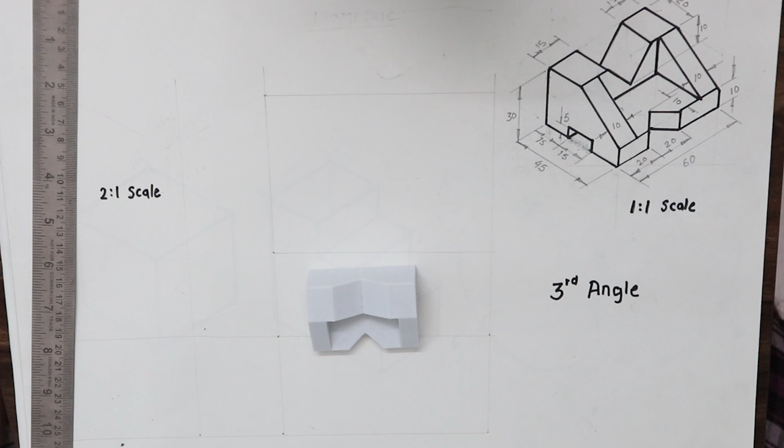Okay, hello everyone. Today we are going to do another object which is being seen over here, and today we are going to do the third angle. The earlier video was first angle, and now we are going to do this object in third angle.

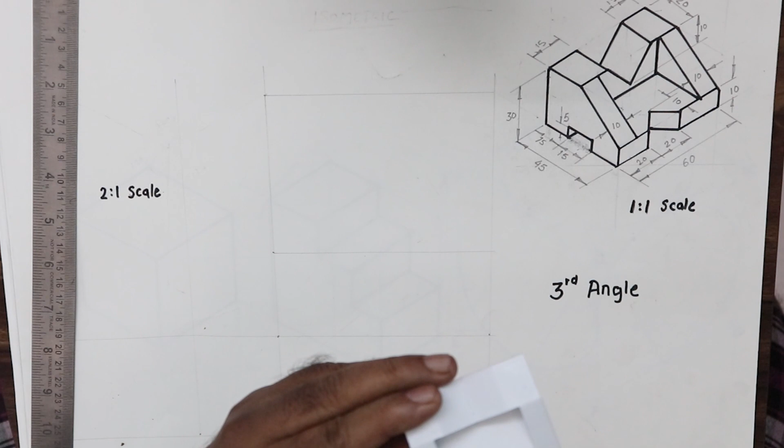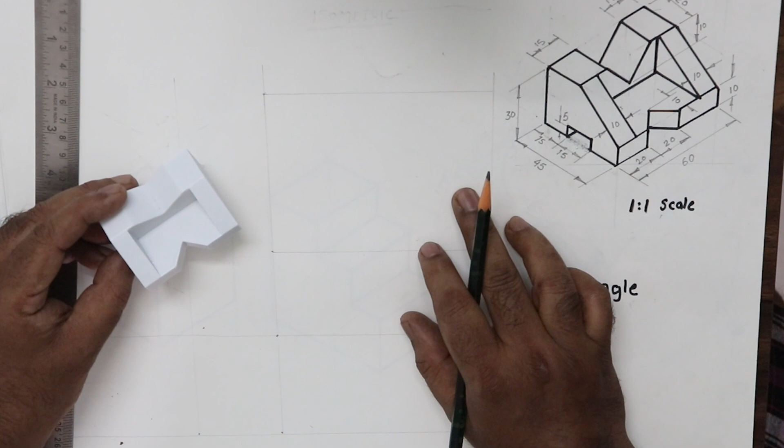Now, if you see, I have already done the isometric over here, and all the dimensions have been given. Now this drawing has been done 1:1 scale. You can see this is 1:1 scale. I have done the drawing, but the views that we are going to do in the third angle are going to be in 2:1 scale. So now let us begin.

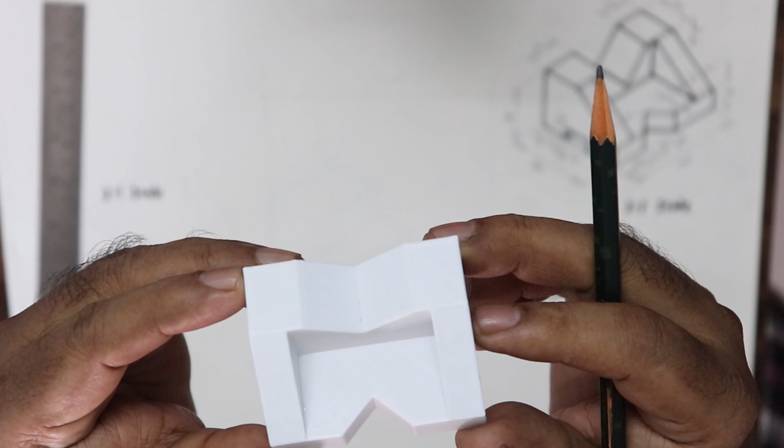I'm keeping this object here for your reference. You all can have a clear look at this object, how the object looks. So you all have a clear idea, and now if you see that this surface, this is the front view. And now first we are going to make the front view over here.

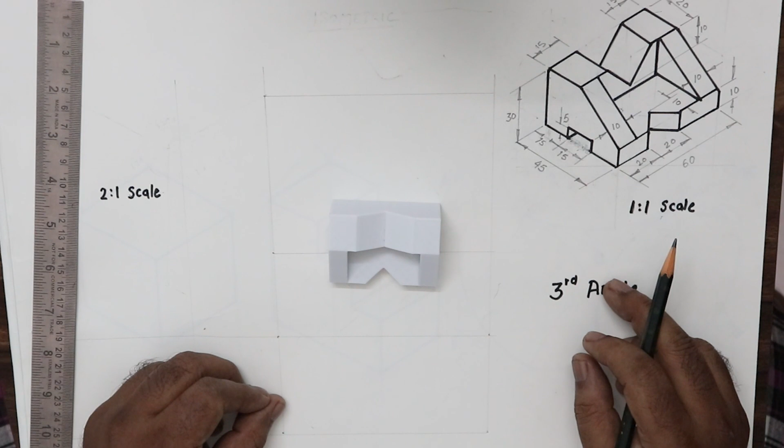So the front view will look probably like this, and then there's a top view which will come at the top, and it will look something like this. And then we have the left hand side view, from this side. So in the third angle projection, the left hand side view comes at the left, so it will look something like this. So let us try and do this drawing now, and let us see how it works.

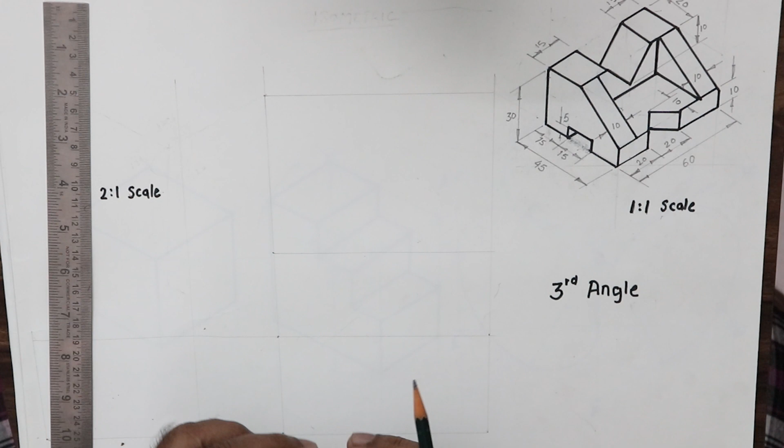So first and foremost, let us go to the front view, and let us make the block. So now the block will be the length of the object, the breadth of the object, and the height. So if you see over here, faintly I have done the block. I have done this block is 60 by 30. Height is 30. I'm sorry. And the front side is 60.

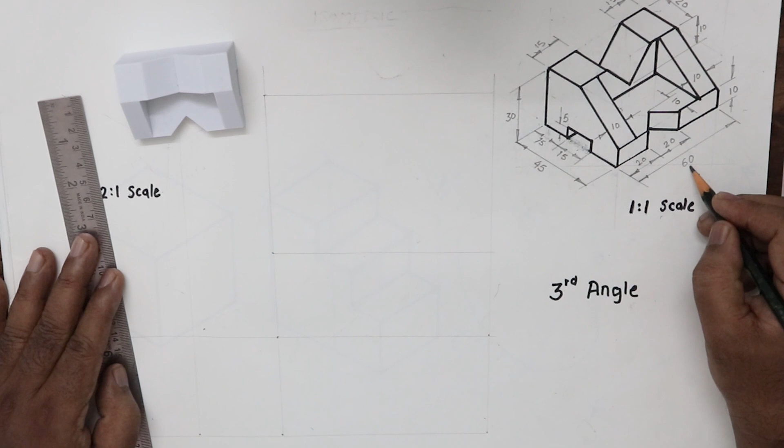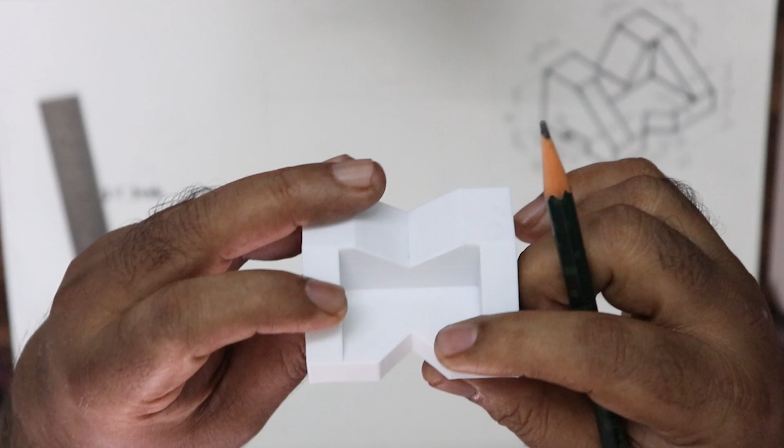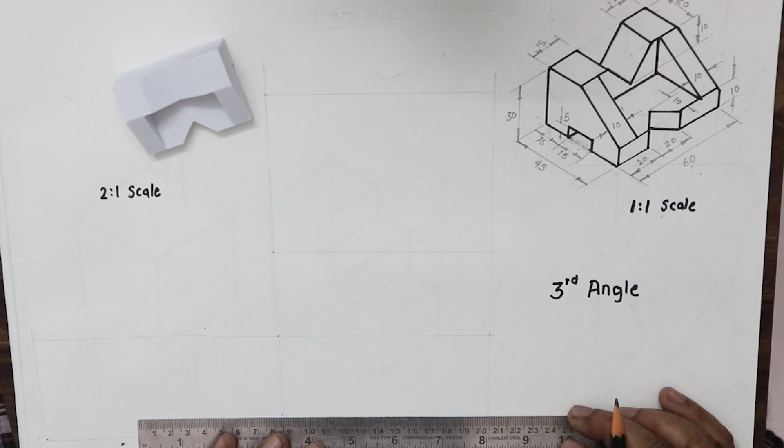Now let us start doing the drawing from the base. So if you see, the base of this object is around 10 mm thick. If you see over here, this is 10 mm, and here it is given as 10 mm. So I will draw a line that is 10 mm. Basically, when you do your drawing, see that your construction lines are very thin, so that you can easily rub it off.

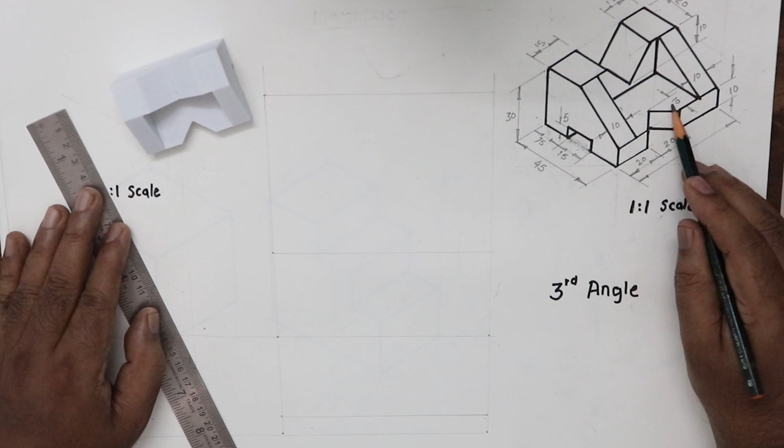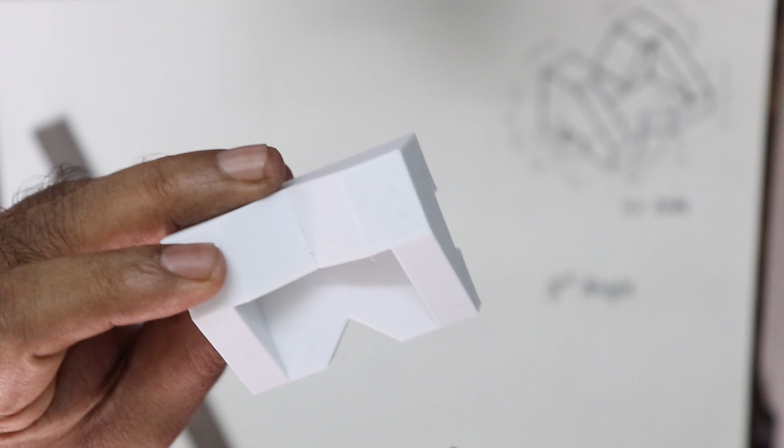Now I have done the 10 mm thick, and now I will take this V groove which is there, which is 20 from both sides, and it's a 20 mm thick V groove, 10 mm deep. So this V groove which is there, you can see it is 20 from one side, it is total 20, and it is 10 mm deep. The depth of this is 10 mm. So let's start by doing that.

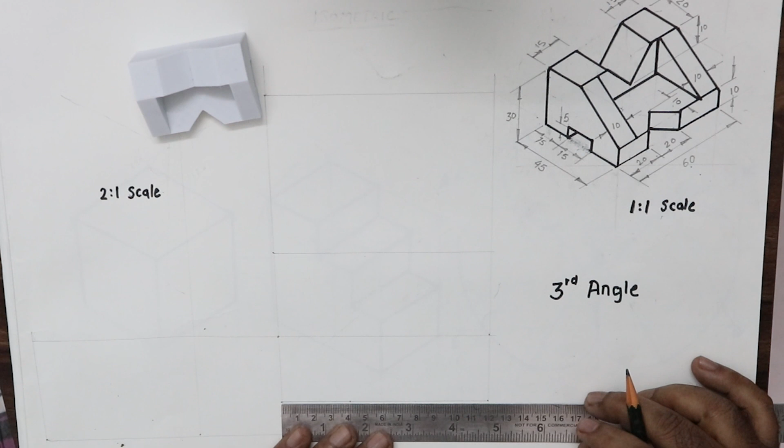So now here, since this is 2:1 scale, I am taking 2:1 scale, so I have to double it. So the 10 will become 20. Now I'm taking this as 40, and again I'm taking this as 40, and there's a center line on 20.

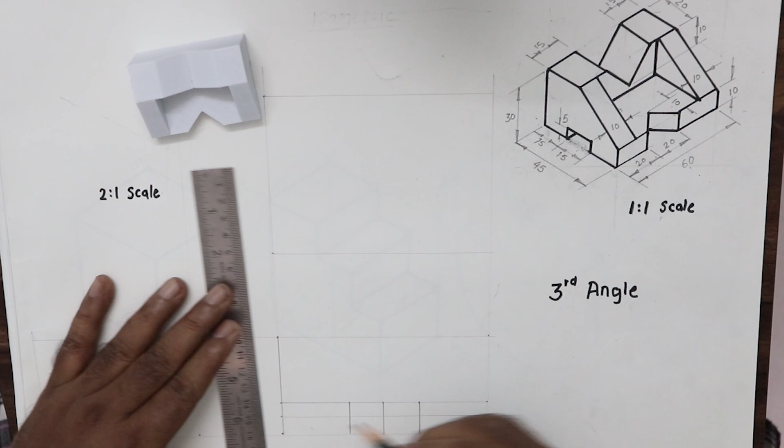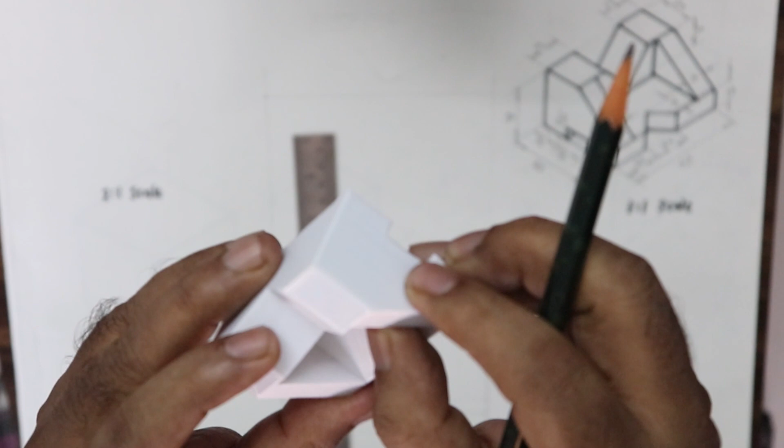Now you can see there is a small step over here, the support, which is also 10 mm thick. You can see this, it is 10 mm thick. So we are going to do that, but here it is going to be 20, since it is 2:1 scale. So I'm going to make this 20.

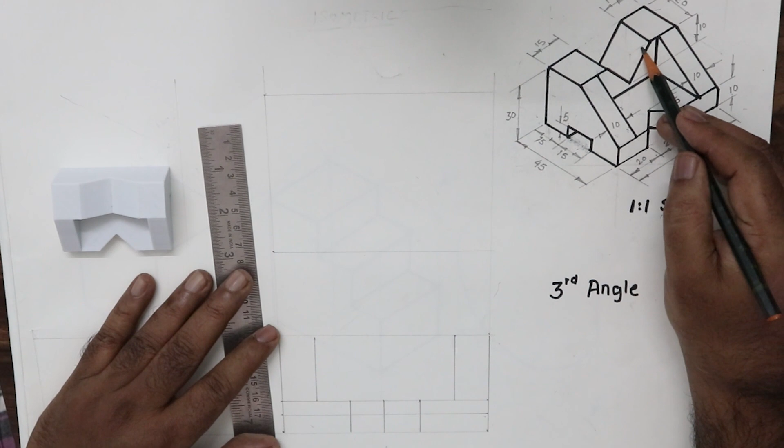And now I need to do this groove which I can see from top over here. So from front view, this groove will look like this. You can see this groove over here very clearly. Now what is the size over here? It is 15 and the depth is 5.

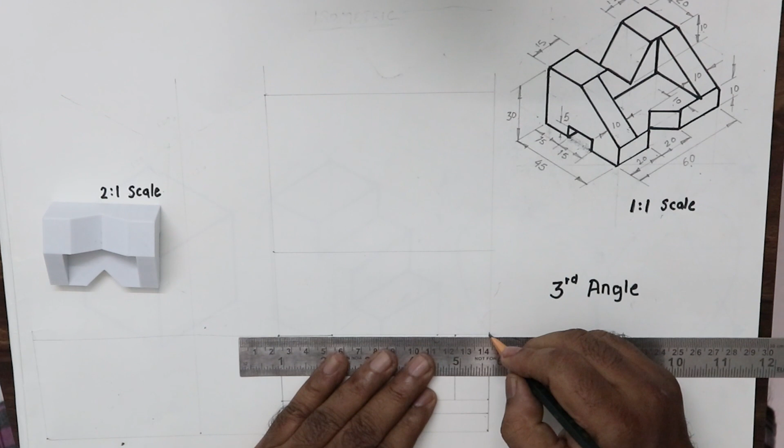So I am taking 15. That is, now I have to take 30 over here, 30 from this side, and the depth of this is going to be, since it is 10, I am going to take it as 20.

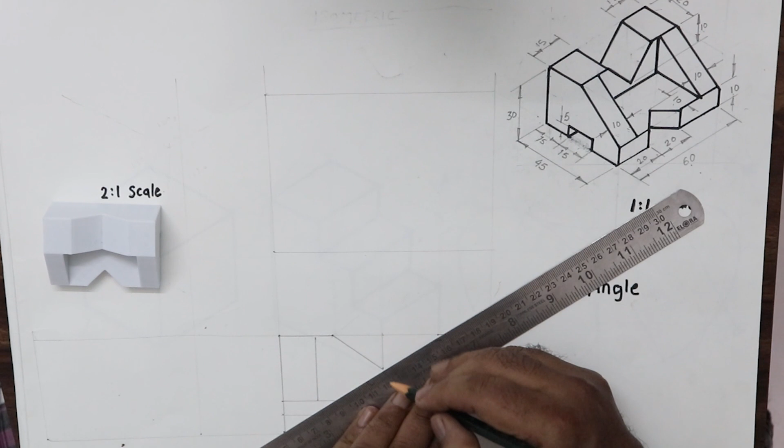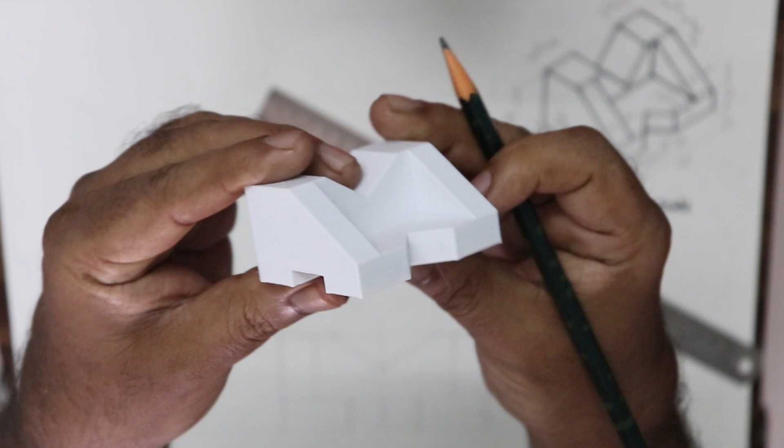So I am sure you can see this image over here. It looks exactly like this. But if you see, there is a groove at the side. There's a groove at the side, and this groove will come as a dotted line. So I already have this over here, and this will come as a dotted line throughout.

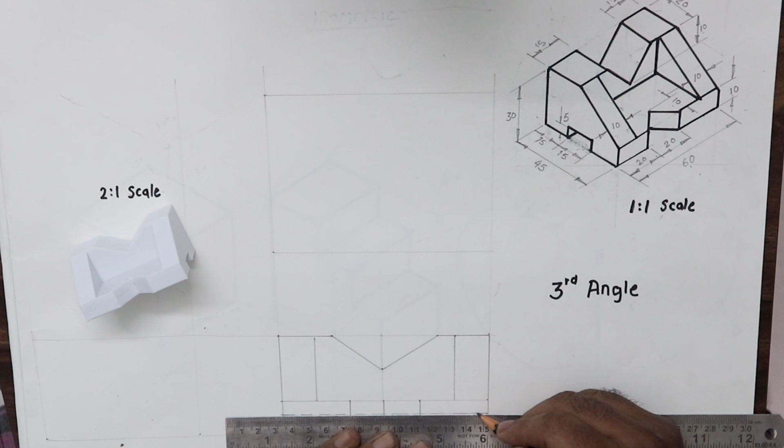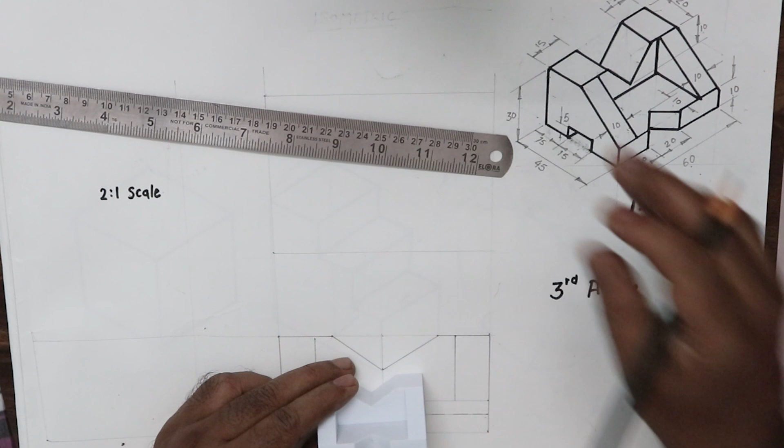Now let us go to the side view. So the side view, the left hand side view in a third angle will always come on the left hand. I am repeating again, the left hand side view in a third angle drawing will always come on the left hand. So this object, the left hand side view, when I am turning it, it will come on the left hand and it will look something like this. So now let's start drawing this side view.

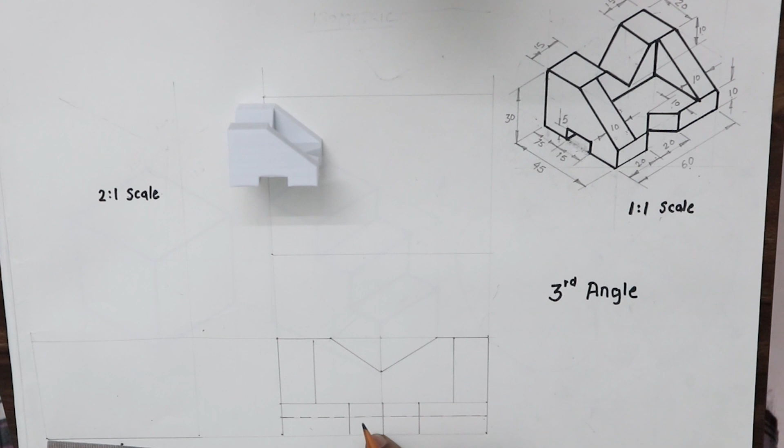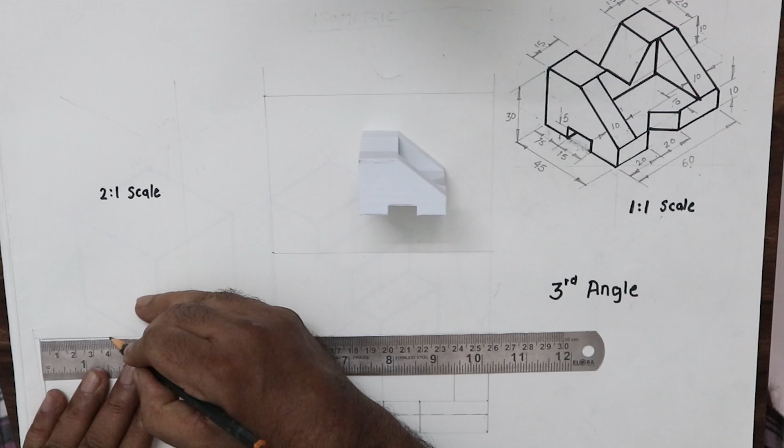So now here I have already got the block. I am taking the height as 30, but here I am taking it as 60. And now if you see this over here, the distance of this thing over here is 20. So here I am taking it as 40 since it is 2:1, and here it is 10. This will come like this.

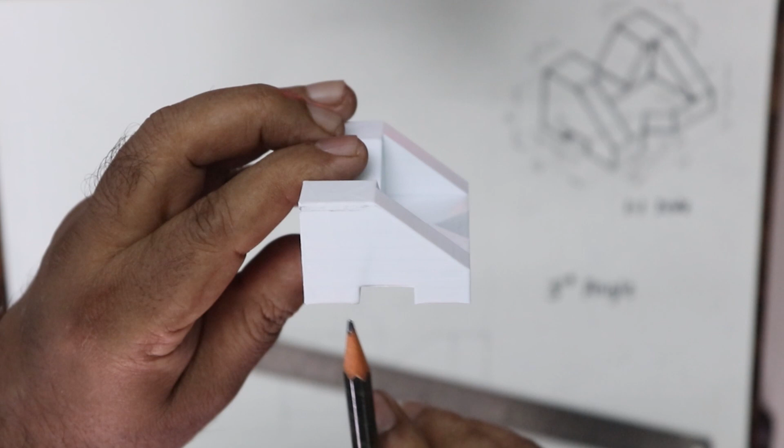Now what we have is this groove which is there. It is 15 and 15. So we have to take it as 30 and 30. And the depth of this groove is 5 mm. If you can see over here, it is 5 mm. But here we need to take it double, that is 10 mm.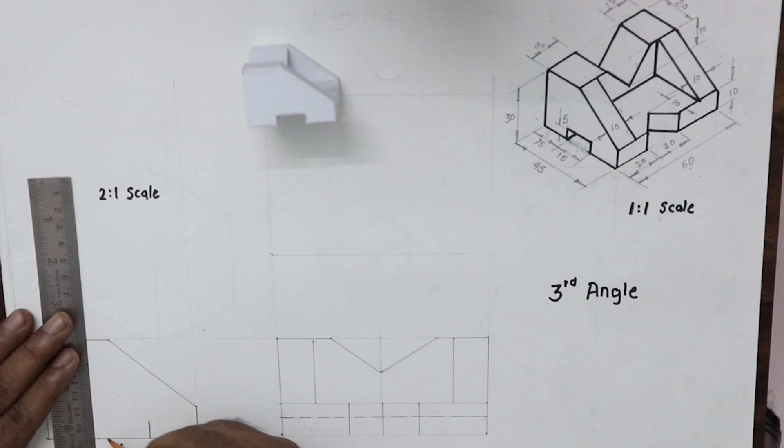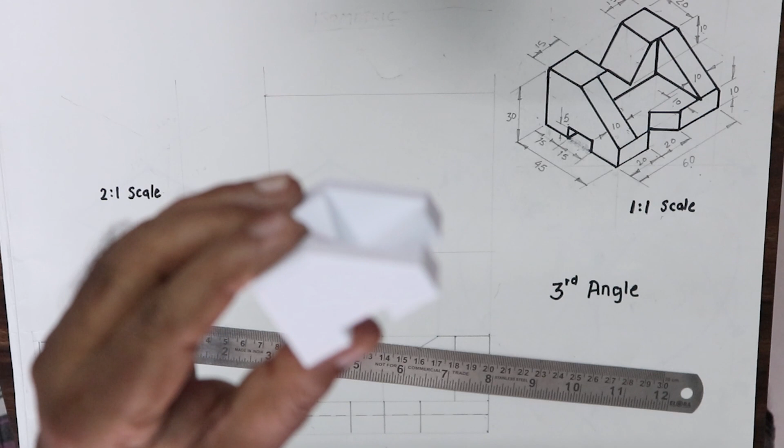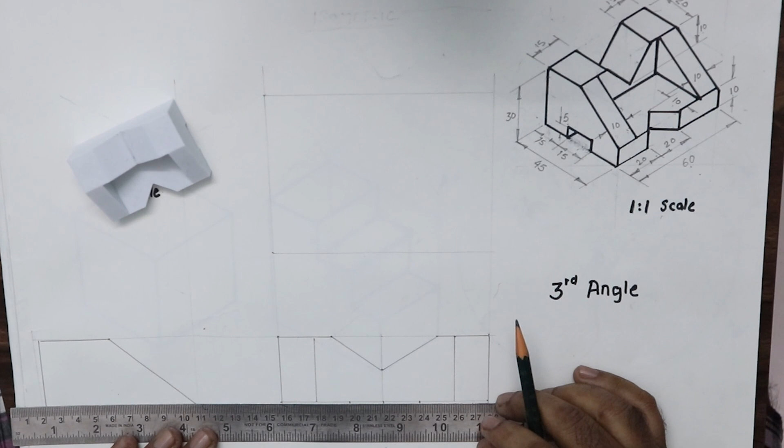Now, since there are some hidden lines in this side view, for example, this line which is hidden, we cannot see this line, the groove which we cannot see, the inside groove, and these things. So these will come as hidden lines. So let me make this over here, drawing the construction line from the front view.

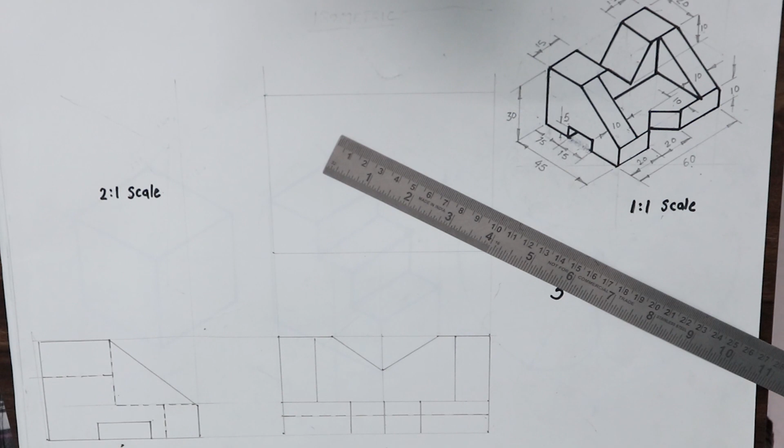So here we have the side view, and now let us go for the top view. Now in the third angle projection, the top view of this object will come on the top. So it will look something like this. If you see from top, the top view will look something like this. So let us begin. Pull the construction line from the front view. I made a block already over here. So I'm just pulling up the construction lines.

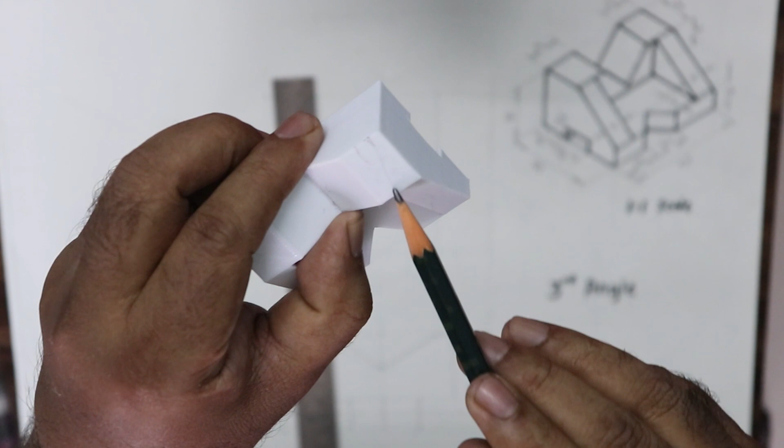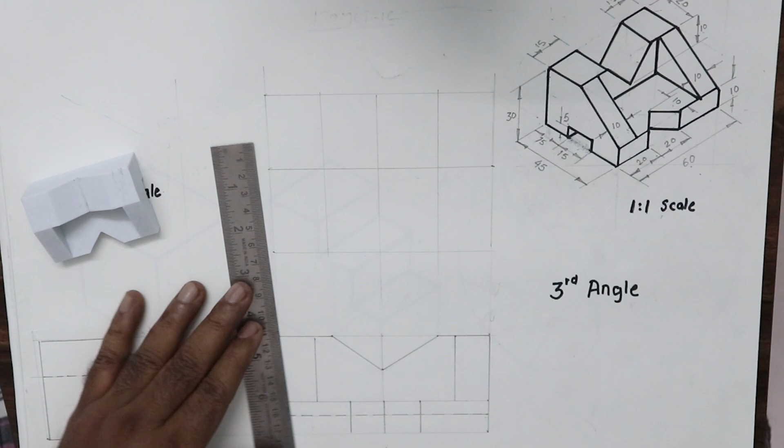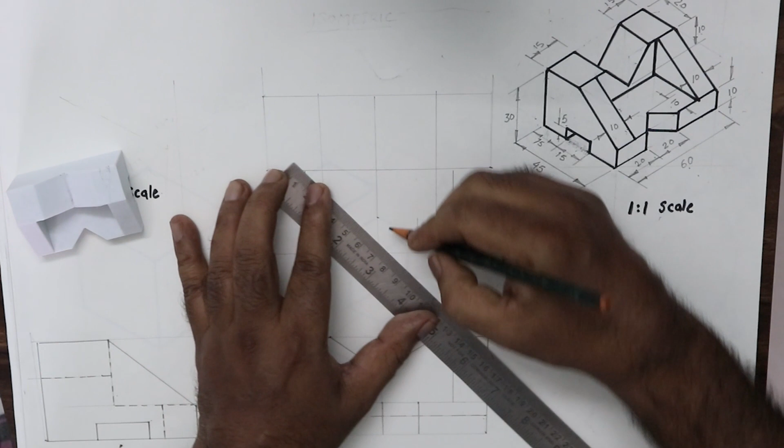This distance over here is 20. So I'm putting this as 40 over here. And down the thickness over here, this is the top groove which we can see from the top side. This groove which you can see from the top side, and basically your figure is done.

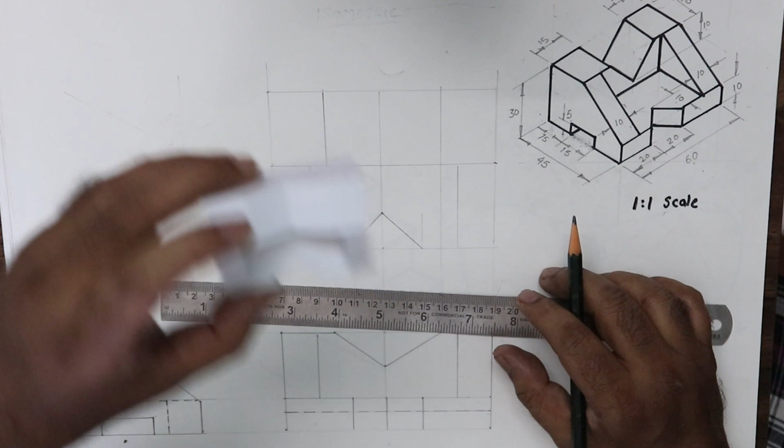Now the only thing that is hidden from this is the groove which is there at the bottom. This bottom groove cannot be seen from the top. That is why we will use hidden lines to construct the groove.

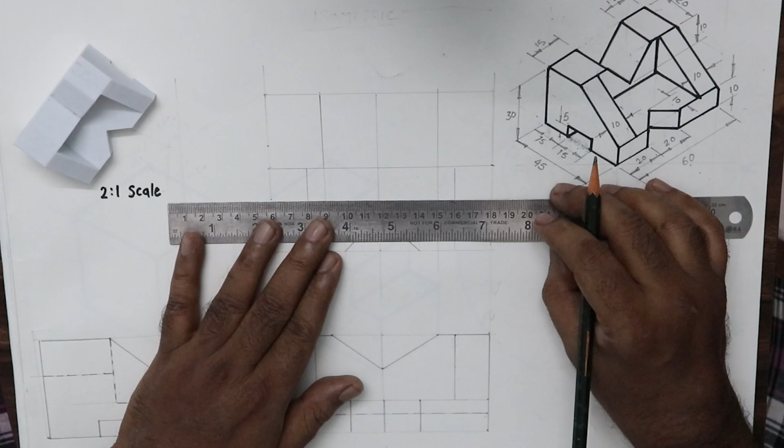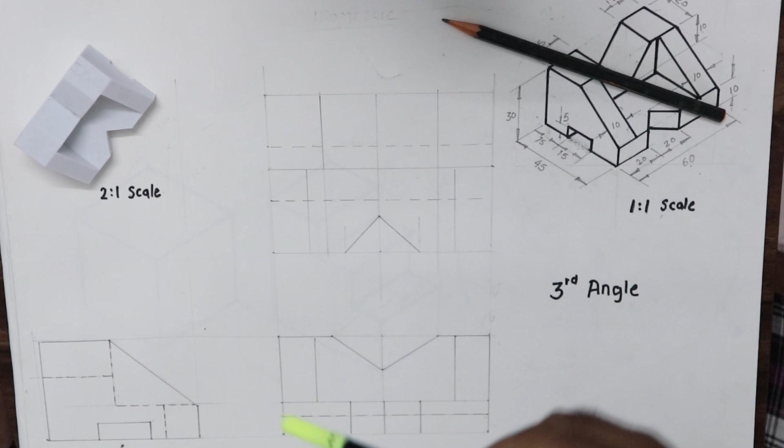Okay, now what I'm doing is using this felt pen so that I can make a nice thick line, and I will complete this after I make this thick line, and with a 0.5 pencil I will make a thin line.

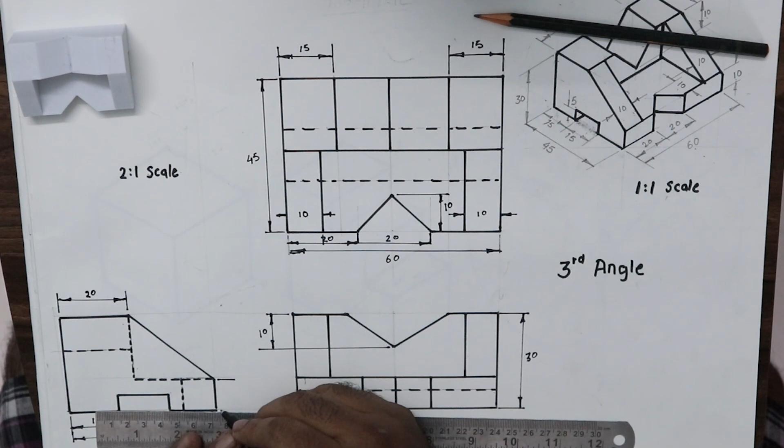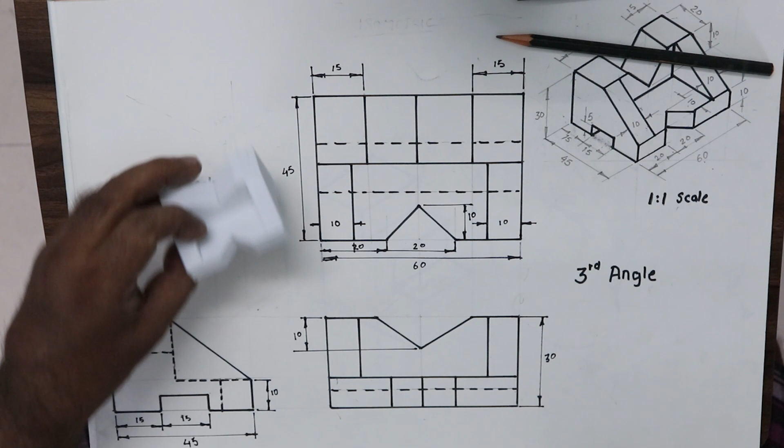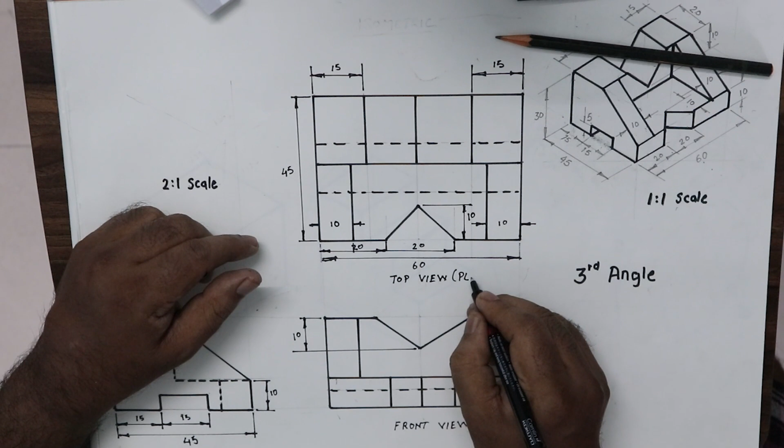So you see, this way we have completed the third angle projection of this object, giving all the details: the front view, the top view which comes on top, and the left hand side view which comes on the left hand side. I will give the proper names now. This is the top view, it's also called plan, and here I don't have place down, so I'm writing over here. This is LH side view.

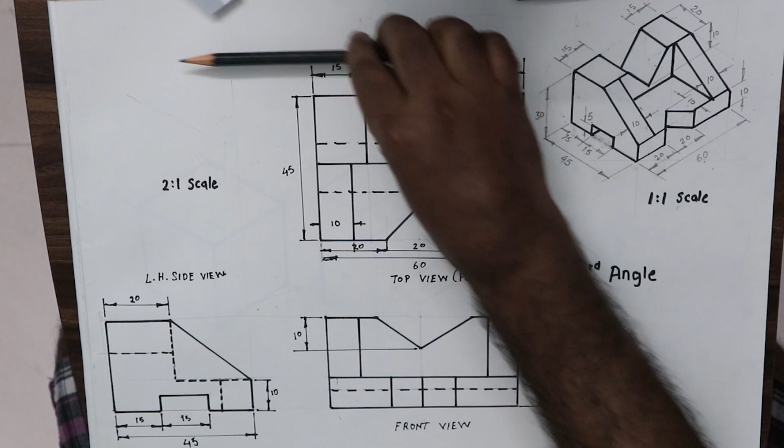Okay, this is the way you make your third angle projection. See that the hidden lines are thin lines and the visible edges are made of thick lines.